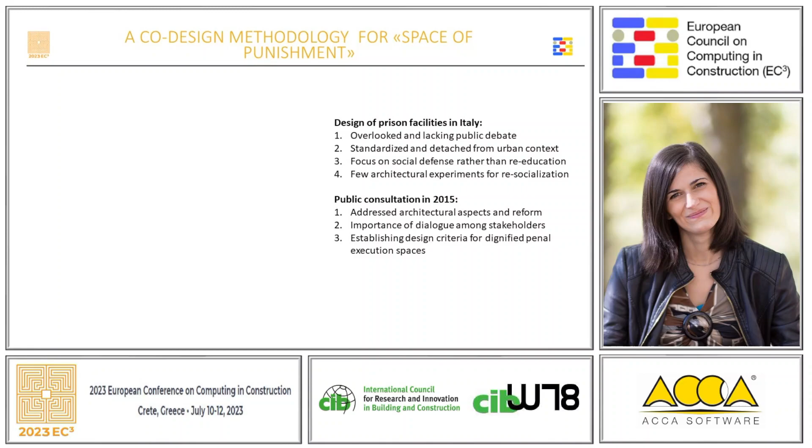However, there have been a few architectural experiments aimed at the education and resocialization of inmates. In 2015, a public consultation was initiated by the Ministry of Justice to address the architectural aspects and reform of penal institutions. On this occasion, it was considered essential to promote a dialogue among the various stakeholders to define new design criteria that bestow architectural dignity upon the space of penal execution.

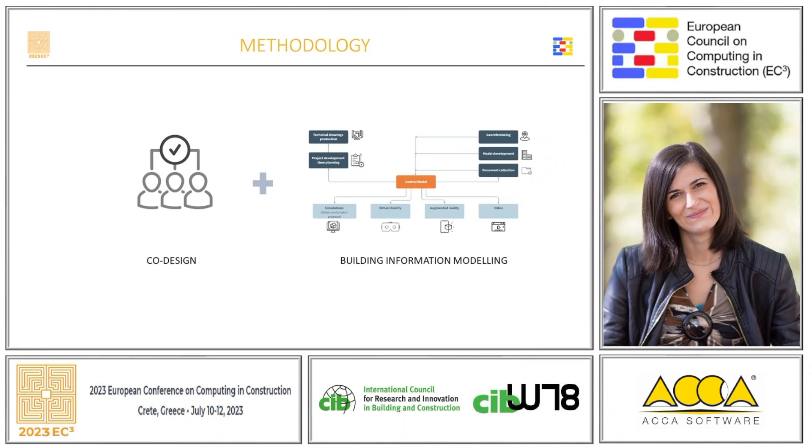The proposed methodology is co-design, actively involving stakeholders in all stages of the process, combined with the use of building information modeling. It is strategic for actively engaging stakeholders and identifying critical issues, opportunities, and needs. The methodology will be described in great detail alongside the case study.

The project was born following the agreement between the University of Cagliari and the Center of Juvenile Justice. The pilot project aims to involve prisoners and operators in the reorganization and improvement of their living and working spaces within the penal system. It utilizes a co-design approach where stakeholders collaborate with designers throughout the process.

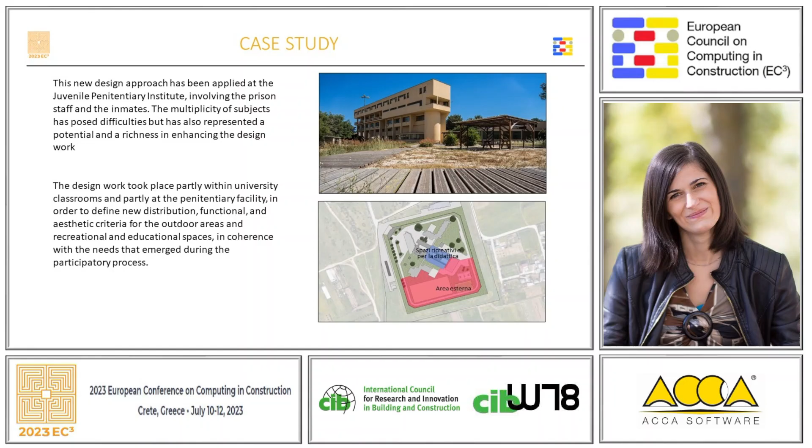The use of building information modeling methodology and tools is strategic in facilitating stakeholders' involvement and identifying critical issues and needs. The project focuses on a specific building within the Institute for Juvenile Justice in Sardinia, Italy. The building requires maintenance and suffers from design issues, such as repetitive and anonymous cell arrangements, inadequate furnishing, and a lack of identity.

The project proposal for the Juvenile Penitentiary focuses on the workshops located on the second floor of Pavilion E. The objective is to create a new configuration of spaces that promotes social rehabilitation and improves the quality of the re-educational journey for inmates, while maintaining a high level of supervision.

The redesigned workshops support a strong focus on professional activities while the use of digital tools allows for a variety of planning of educational activities and projects by the penitentiary administration to facilitate training in different areas.

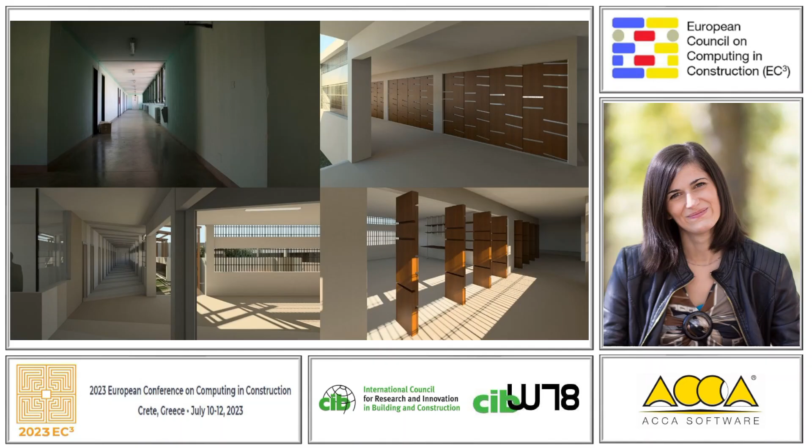The proposal incorporates elements of flexibility in the space, including rotating panels installed in place of doors, a reading room and media library at the center of the area, the presence of safety glass and natural light, and revitalization of the outdoor area for sports activities. These recognize the educational value of sports in the recovery process and preparation of inmates for their reintegration into society.

In the reconfiguration of the outdoor spaces, the design proposal addresses the need for effective supervision of inmates in a large area. Officers stationed with a 360-degree view have been included to ensure proper surveillance.

The use of building information modeling throughout the design process allows for clear and efficient communication with stakeholders who may not be familiar with technical drawing.

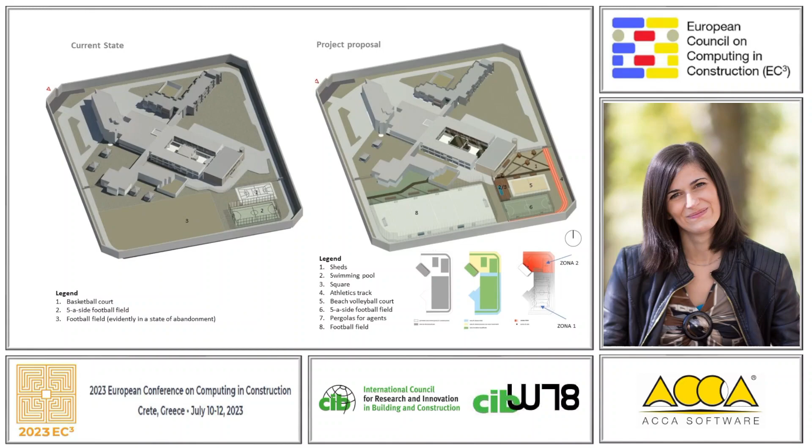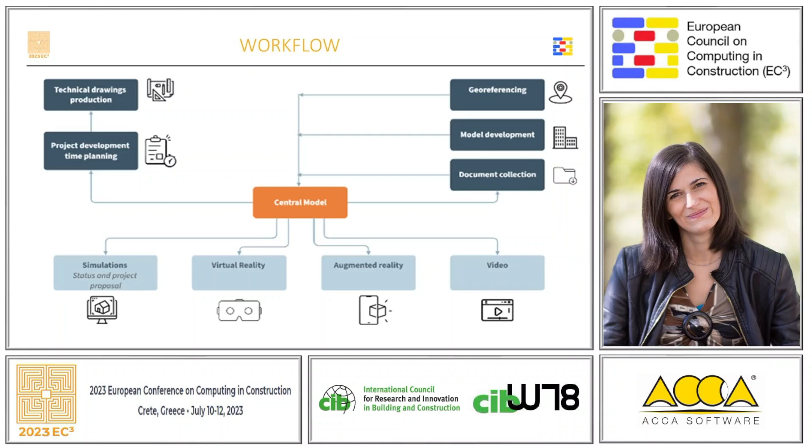The parametric model and Revit software accurately represent the design intervention, including demolished and rebuilt elements, quantitative and qualitative data, along with feedback from various stakeholders such as the warden, educators, teachers, psychologists, volunteers, prison police, and inmates, inform the design choices. The parametric model facilitated the creation of photorealistic renderings for realistic virtual representation of the design.

There are two types of VR techniques: non-immersive and immersive. Non-immersive techniques allow users to interact with the virtual environment using conventional tools like a keyboard, mouse, and monitor.

Immersive techniques offer more realistic experiences, where users are surrounded by screens placed in a cave automatic virtual environment, or wear a head-mounted display for a fully immersive experience.

Both immersive and non-immersive VR techniques can be integrated with the building information model. To address the limitation of BIM models and renderings in conveying spatial properties, the design process incorporated virtual reality. VR provides a more comprehensive representation of the design choices, facilitating greater stakeholder involvement in the evaluation and validation of the intervention scenario.

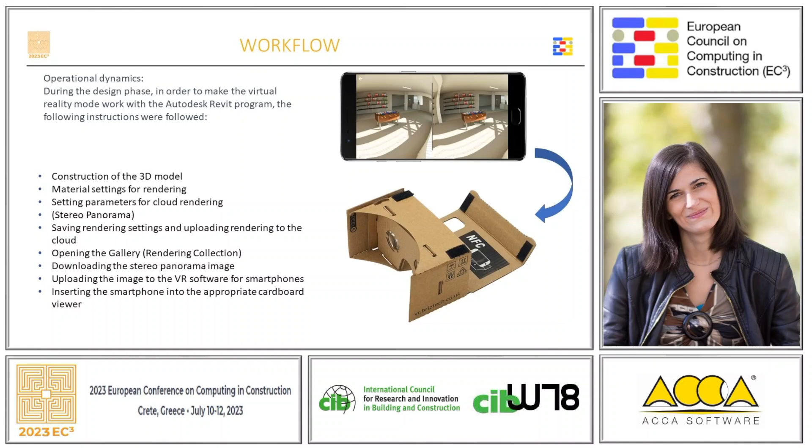This immersive VR experience enables stakeholders to better understand and assess the design choices made during the project.

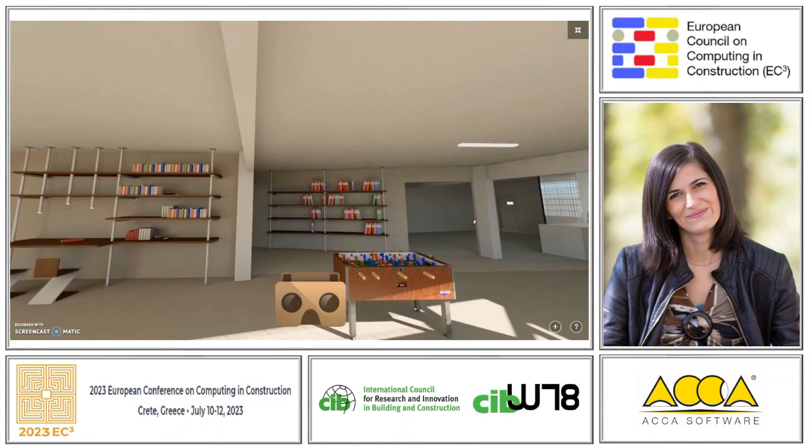Augmented reality is an interactive graphic system that allows one to act on a video image stream, modifying reality by adding, in real time, virtual content and animation.

While at first this technique may be confused or overlapped with VR, AR differs significantly from VR. The difference between VR and AR is that in the first case, one is observing on a screen the projection of a fictitious world made entirely of virtual objects.

In the second case, what is being imaged is an integration of real images and virtual objects.

Interactivity is another key concept. The virtual objects that augment the video stream are not static but can perform movements and animation in response to human actions. The Augmented application allows different users to enter and share several models in the different formats allowed.

Including OBJ, to visualize the model, reference elements, marker or fiducial symbols must be created. These are elements that are recognized very easily by the camera software, which can have different shapes and characteristics. Often the QR code is used.

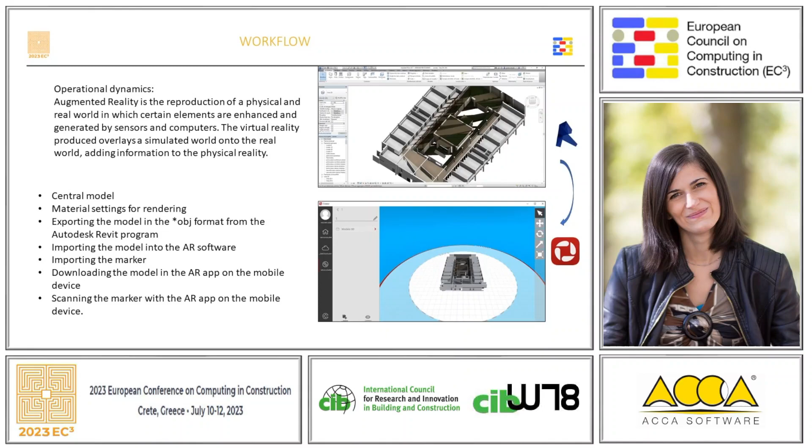In this specific case, to visualize the model, a floor plan of the building was selected as the marker. When the application installed in the smartphone detects this marker, it understands the location of the model, which is subsequently displayed. The software allows the content of different formats to be associated with the model: text, video, photograph, etc.

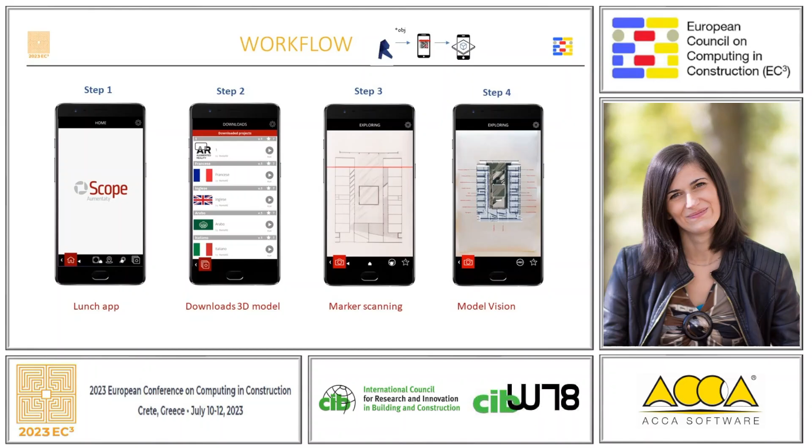The AR technologies implemented in this specific experimentation allowed for overcoming language barriers concerning foreign inmates.

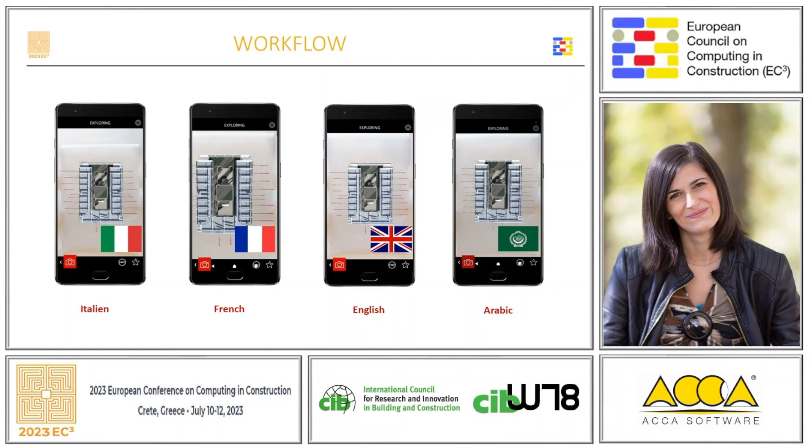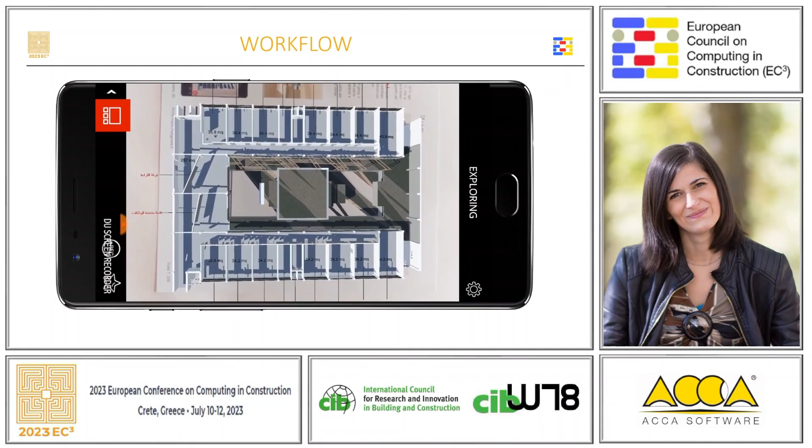Importing the central model into the open-source application Augmented allowed different users to enter and share the building model in the OBJ format. In our case, the application allowed texts and dimensions to be displayed according to different languages and measurement systems to support communication with a multi-ethnic user base.

In conclusion, the integration of building information modeling, virtual reality, and augmented reality has transformed the design process into an inclusive and participatory experience. By involving marginalized groups and leveraging innovative tools, we have fostered a sense of belonging, improved dialogue, and created alternative design models.

This approach not only enhances the quality of our projects but also empowers individuals and promotes social inclusion. Together, we are shaping a more inclusive and equitable future through design innovation.